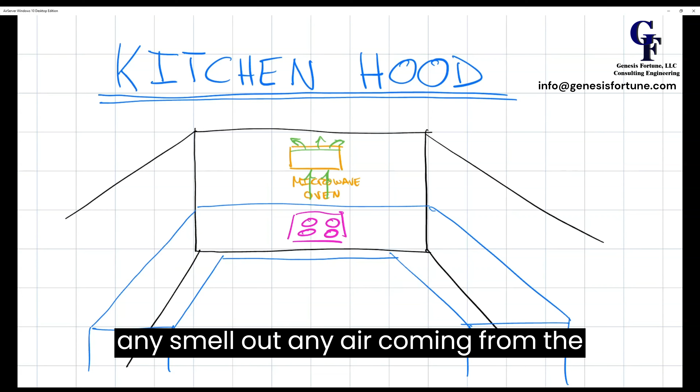The most simplistic way of a hood is the microwave oven. This is the one that most people have in every house, in which any air, when you turn on what they call the hood within the microwave, it just takes air coming from, let's say, if you have the range here, it takes the air coming from the range into the microwave at the bottom, and then it usually has a way to dispose of this air from the top. It acts more like a filter, but it doesn't take any smell out. Any air coming from the bottom just gets released from the top.

So now let's talk about a regular hood, the way that it should be. Let's start with the basics. Imagine that you have a house, something like this, and in this house you have an area which is the kitchen. Let's assume it's this part of the house, and you have the kitchen. For simplicity, I'm going to put the kitchen with a range in this area right here. So this is where the hood is going to be. So you want to put a hood. Now, how big of a hood do you want it to be?

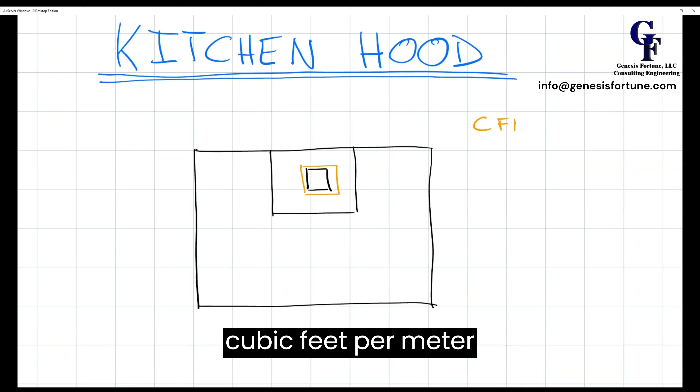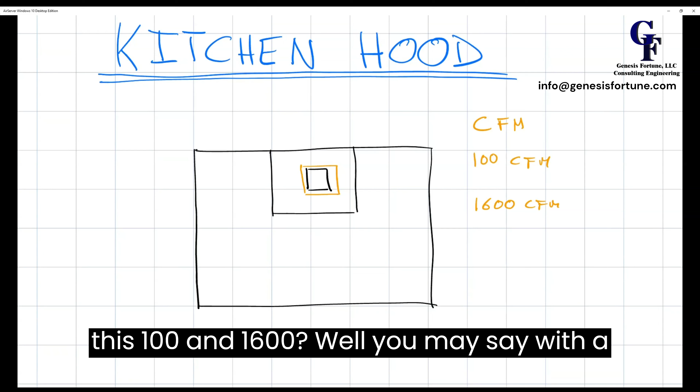Usually, hoods are measured, if you look at the specs, in CFMs. This is the cubic feet per minute of the air coming out from the hood. And there is a big range if you look online at different hoods. They can go all the way from 100 CFMs to maybe like 1600 CFMs. So what's the difference between this 100 and 1600? Well, you may say with a 1600 I get more air out. Yes. Now there are also regulations on what you need to do when you install a bigger hood.

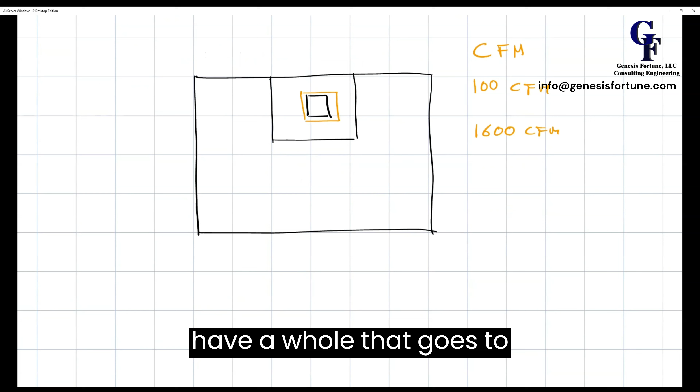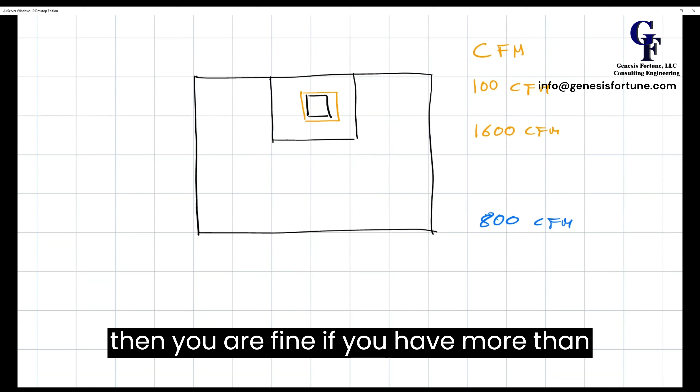This is what the code says: if you have a hood that goes up to no more than 800 CFMs on a residential project, then you're fine. If you have more than 800 CFMs, then you need to install different equipment. So for 800 CFMs, when I say you're fine, that means you just install the hood and nothing else. When you install more than 800 CFMs, then you need to consider another equipment.

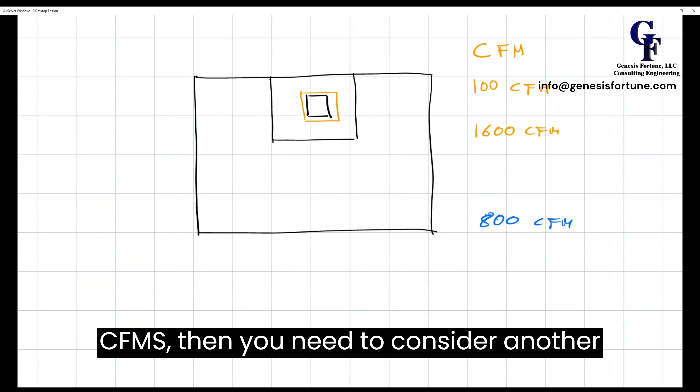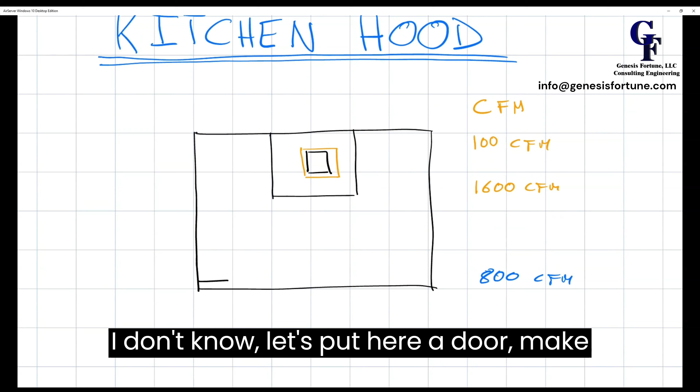So what is that equipment? Imagine that this is your house, something very simple, and let's put here a door to make it super simple. This is the kitchen and a door.

If you have a hood that is taking, let's say, 1600 CFMs, and you connect the hood, and the hood is absorbing 1600 CFMs, it will be very difficult to open this door.

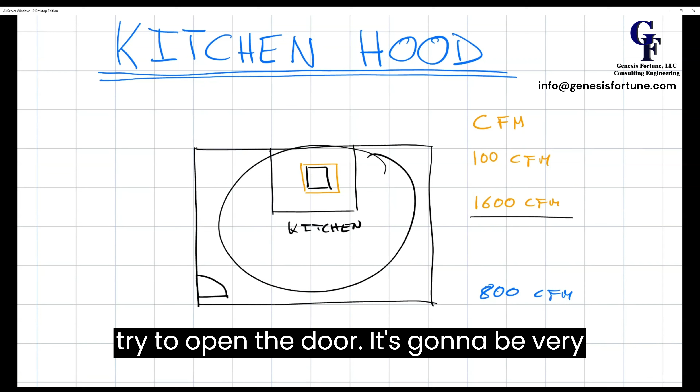Why? Because in this whole area that we call the house, the problem is that it's going to create a negative pressure. It's like a vacuum. So when you try to open the door, it's going to be very hard. Not to say other appliances that have gas combustion, it's not safe.

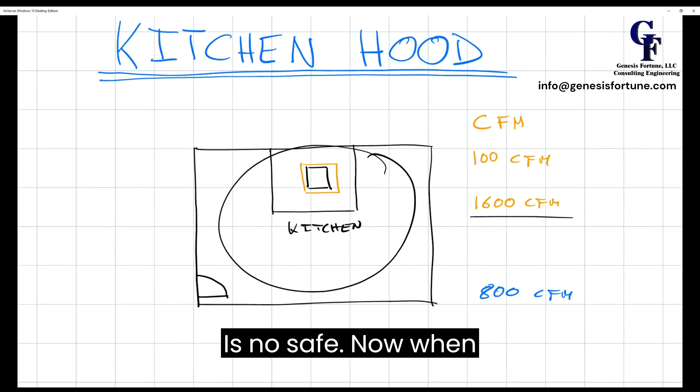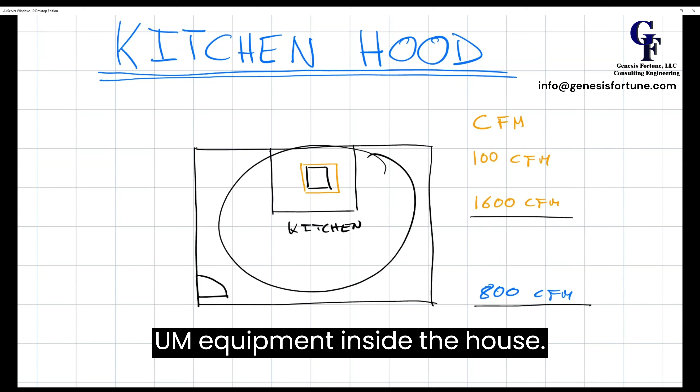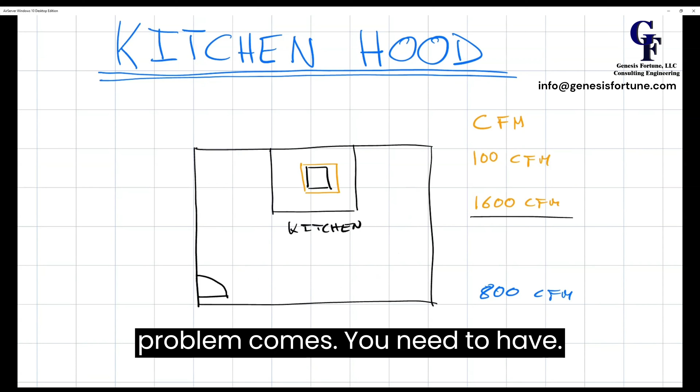Now, the threshold is 800 CFMs... actually, if you are below 800 CFMs, and you don't have any gas equipment inside the house, then you're fine. If you are more than 800, for sure this is what you need to do. If you have more than 800, this is where the problem comes.

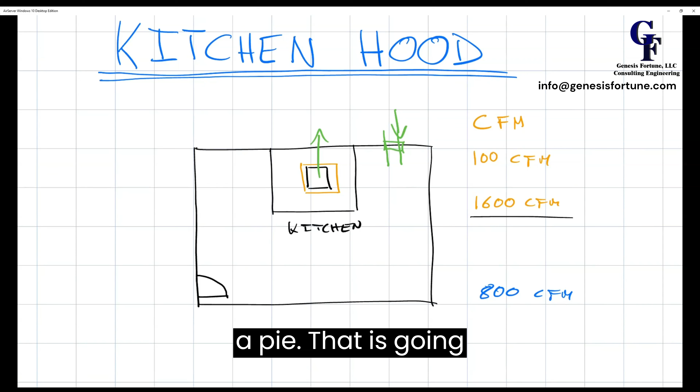This is where you need to consider something else. You need to also have an intake air, meaning that when you are exhausting air through the hood, you also need to have air coming in. This air coming in is going to go through a pipe that goes into the house, usually in the same area of the kitchen.

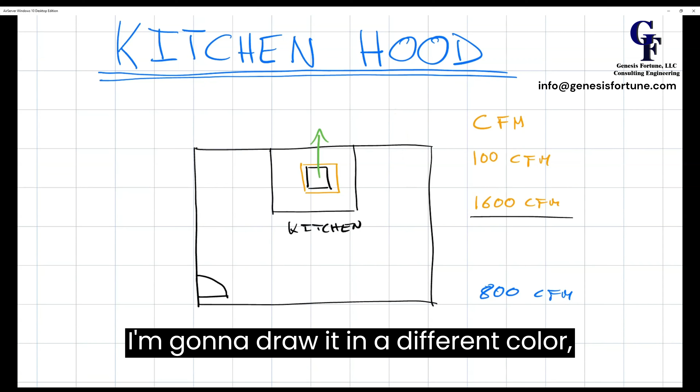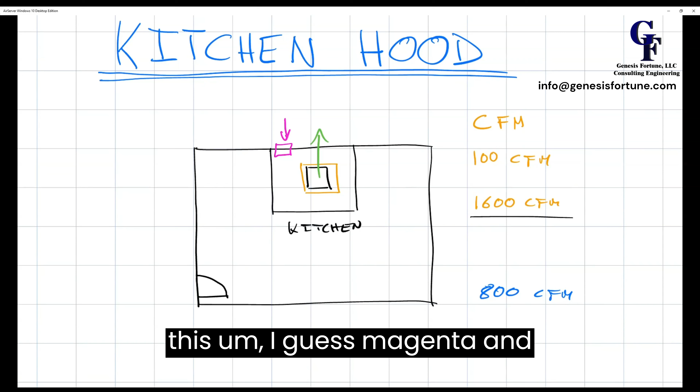So let me draw it. Since this example is so small, I'm going to draw it in a different color. Right here, you will have air coming out in green, and you will have air coming in on this magenta line. But this air coming in will have what we call a motorized damper.

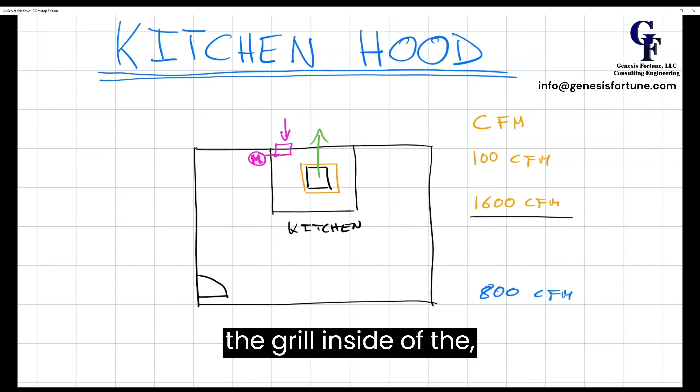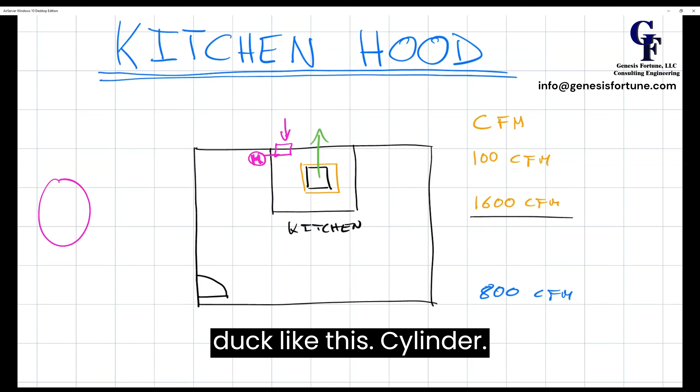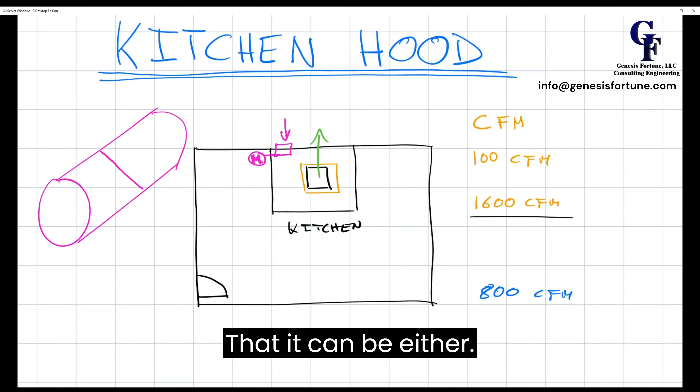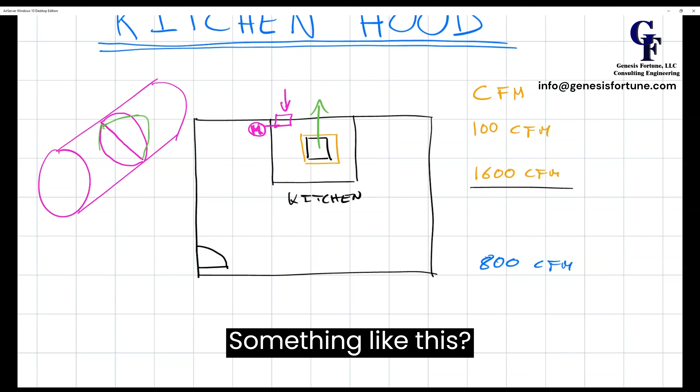This blade can be either closing, or it can move and stay in another position. I'll put it in green. Mind that this blade is completely parallel to the cylinder, something like this. So when the blade goes completely parallel to the cylinder, it allows the air to go through.

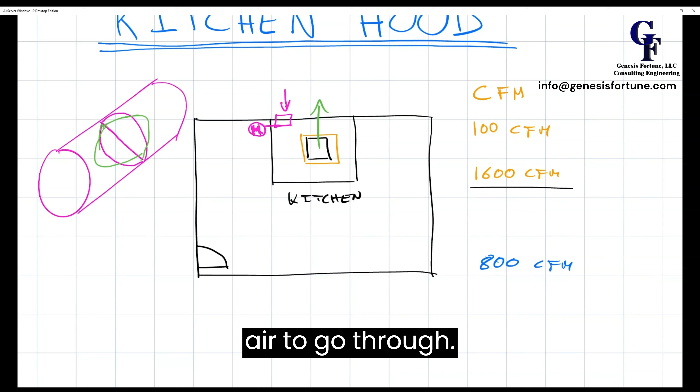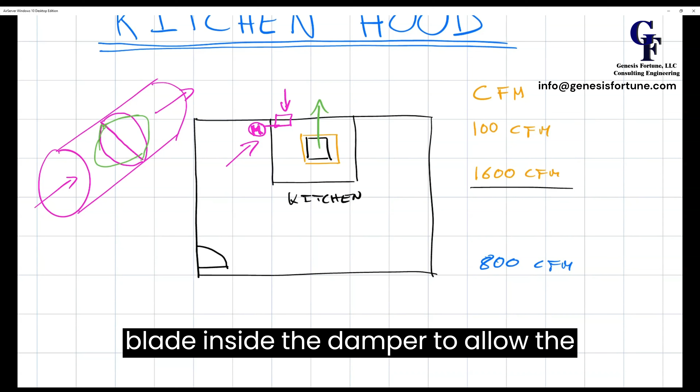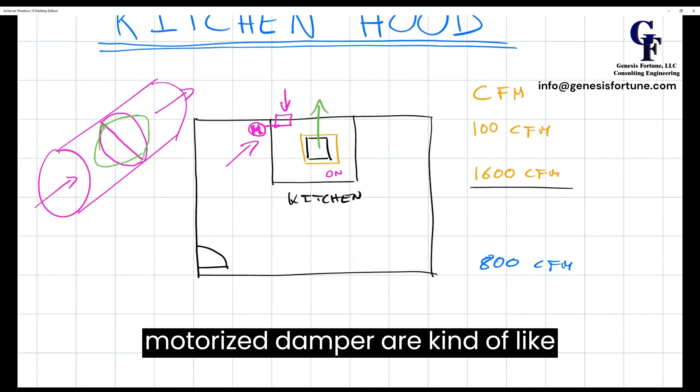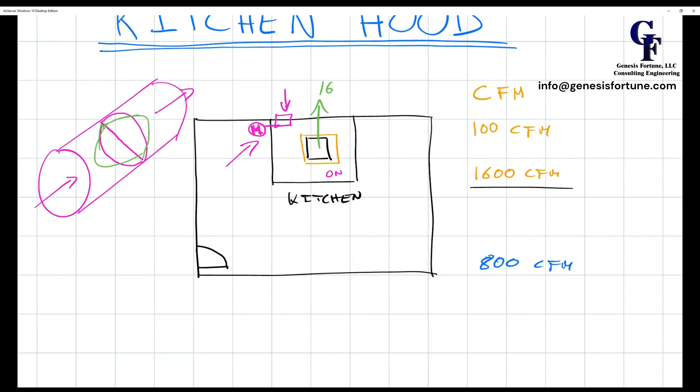So the motorized damper, this one that I put right here, will action the blade inside the damper to allow the air coming in only when you switch on the hood. So the hood and the motorized damper are kind of synchronized. That will allow, let's say, in the event that you have 1600 CFMs coming out, because you decide to buy a very large hood, then you're also going to have 1600 CFMs coming in.

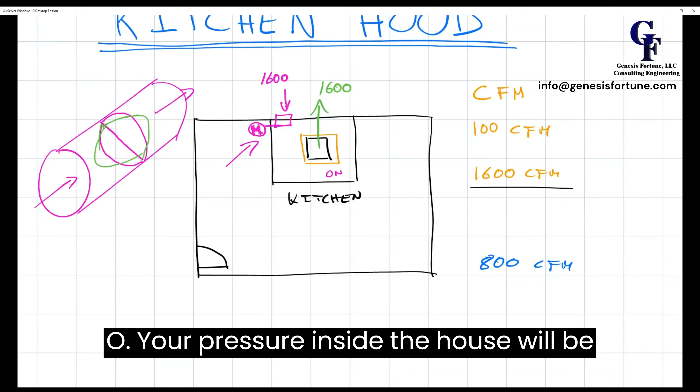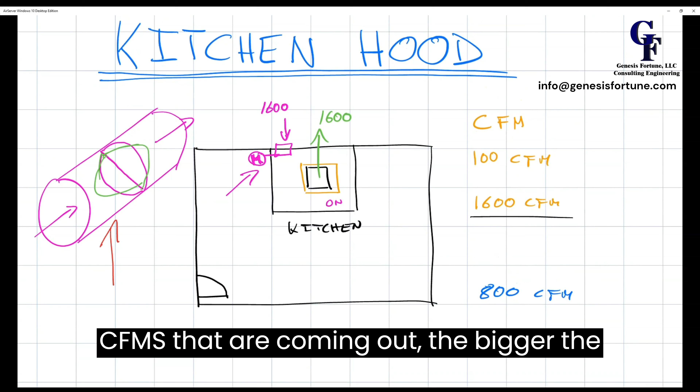So your pressure inside the house will be equivalent and the same. I'm not going to get into the size of this cylinder that I put here as an example, but obviously the bigger the CFMs coming out, the bigger the pipe needs to be to allow those CFMs coming in.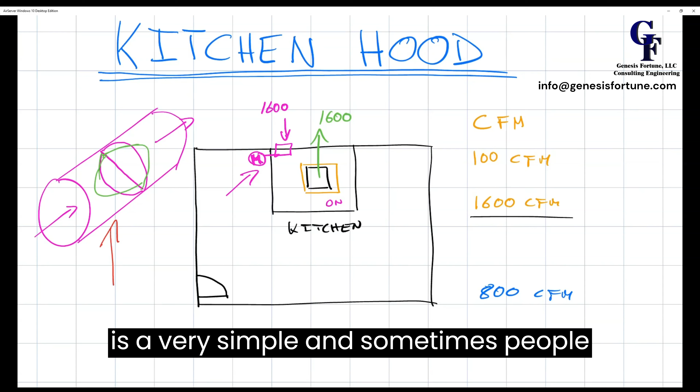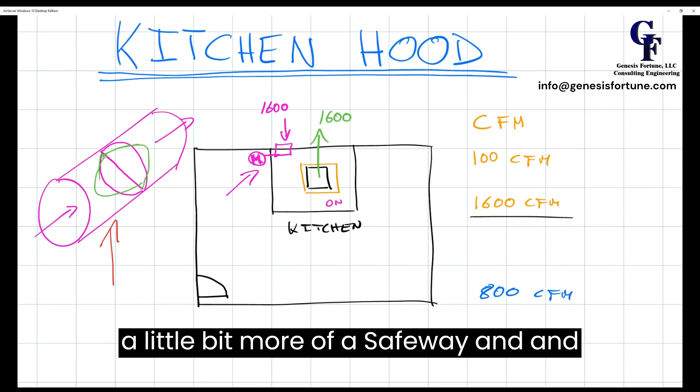So this is very simple, and sometimes people do not understand, but I hope this will help you if you are shopping for a kitchen hood. Now you know a little bit more of a safe way that meets the code, and it will prevent any nuisance issues inside your house if you decide to install one.